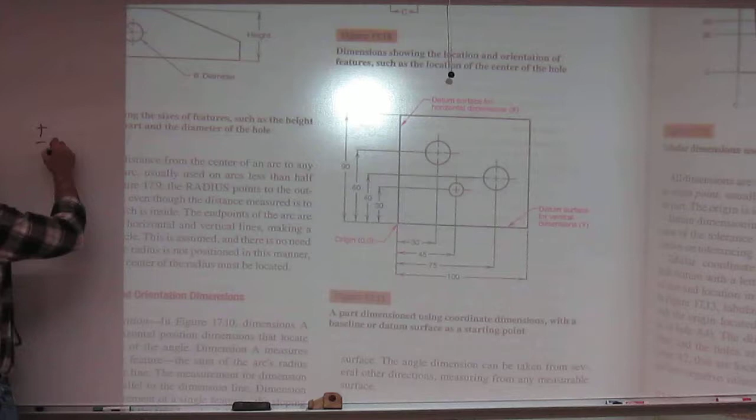0.02 inches. Now, it looks like it's metric. Maybe I'd do 1 millimeter. Anyway, 30. So when I go to locate this hole, I can be assured that that is 29.98 to 30.02, right? Due to that tolerancing.

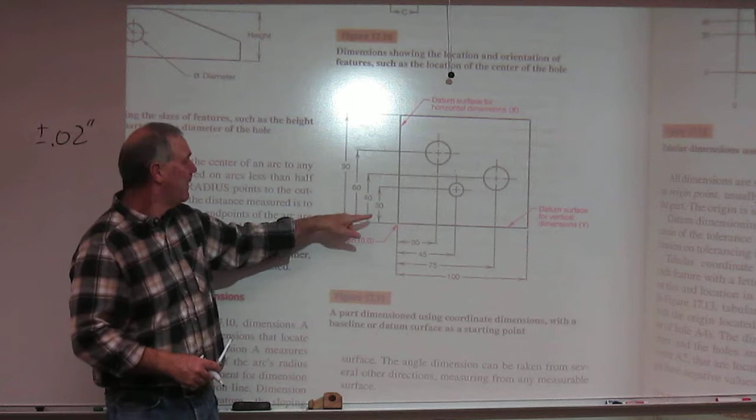Now, when I come to this part, the 40, what's the size of it going to be? It's going to be 39.98 to 40.02, right? It's got the same tolerance. I know it's going to be 40 plus or minus 0.02. What's this guy going to be? 60 plus or minus 0.02. Each dimension has its own tolerance.

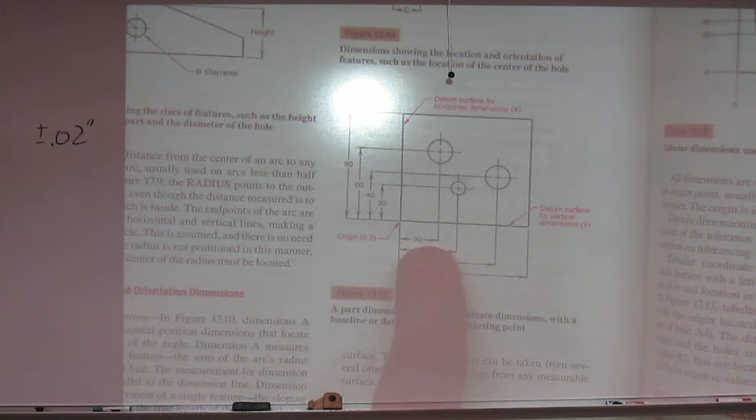If I need a high degree of accuracy, this is the way I'm dimensioning, right here, and it's because of tolerancing. Now, let's compare it with this one. So the first one here is 40. This would be either 39.98 or 40.02. Let's assume right here that it is 40.02. Okay? Now I come to this part, and let's assume it hits its upper limit too. It's going to be 50 plus or minus 0.02.

Let's say it is 50.02. Well, what size is this one right here? It's 130 minus 90. This should be 40, right? Well, can they now do 40, 50, 40, and still stay at 130? Can't do it. They would be over, because this is really tolerancing stack up.

Okay, so on this one, we know we're 40.02 right here. Well, when we get to this side right here, I can be up to 50.04, correct? If I'm measuring from this edge. So this one has that tolerance plus that tolerance. And the next one would have it again and again. And if you put 5 or 6 of these in a row, you can be significantly off if those are important.

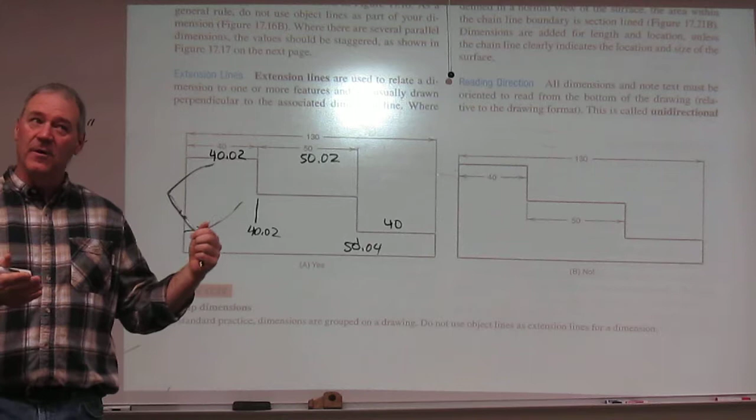Now, when I say this, neither one's good or bad. Maybe what's important is the 50 compared to the 40 compared to the 40. I would use chain. If I need them to be accurate to an edge, I would use coordinate dimension. So keep in mind, those tolerances are what we call tolerancing stack up. It has a significant part to play when we pick a dimension style, because we can see that tolerance transferred from one measurement to the next, and then those two transferred to the next, to the next.

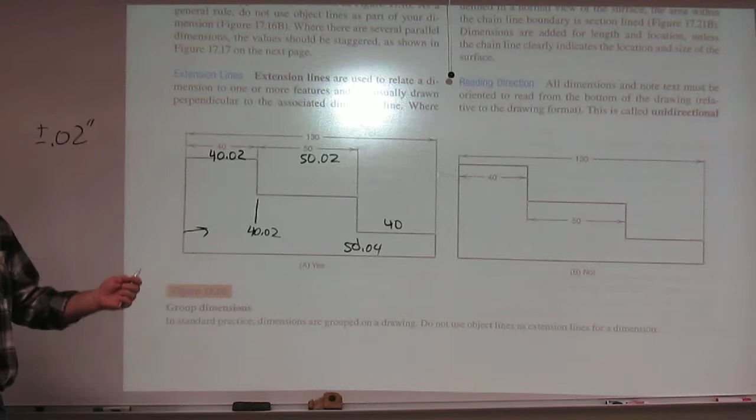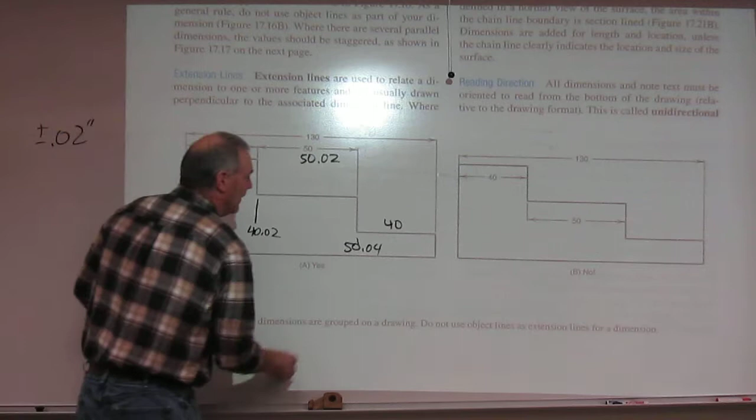You kind of get that? You called it tolerance stack up or stack? Yeah, tolerance stack up is what I usually call it. That just means I've got multiple dimensioning tolerances being applied to the same dimension. So there is a difference on how you do those. Instead of putting the 130, we can continue the dimensioning and put 40 in the area.

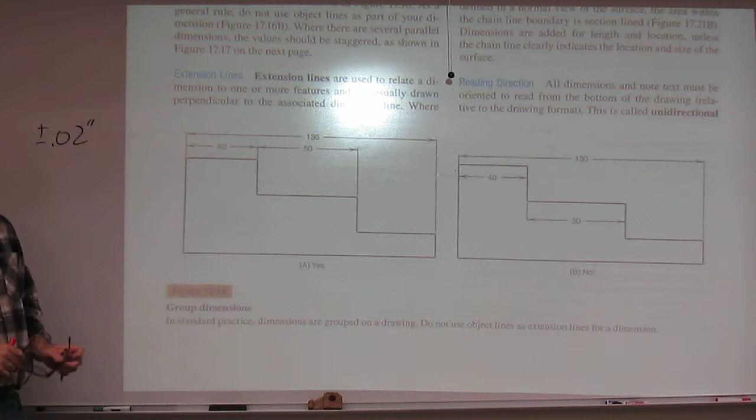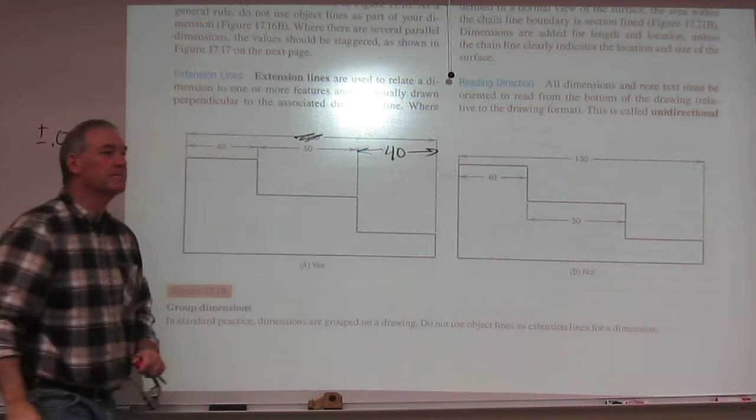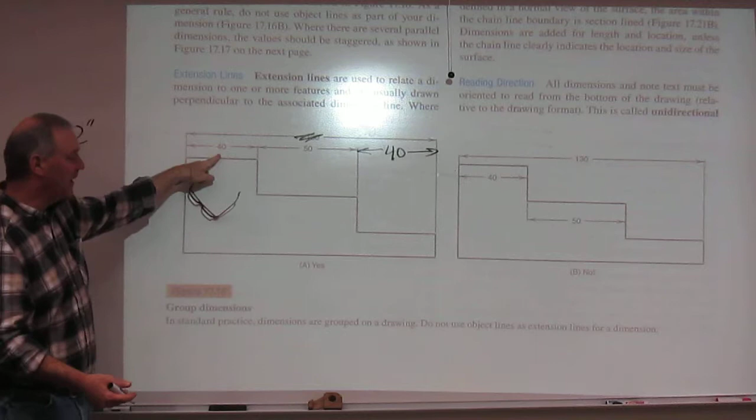Now, that's the other thing I wanted to get to on this figure. So your thing was, why don't I just put a 40 here, tell me if I'm not reading you right, and I don't put that one. Yeah. Okay. This is impossible to build. They will not build this with that tolerance. Statistically, it's impossible. Because keep in mind, this will be 39.98, 39.99, 40, 40.01, 40.02. Well, if I do that and I get over 40.01 and I get over here, I cannot meet this tolerance. I can't meet it.

So what you generally do, and this addresses it, Majed, you're on the right track, but it's dimensioned correctly. What we do is we take the least important part and we don't dimension it in chain dimensioning. So we just leave this area with no dimension, because for some reason we're saying this is the least important part. We know you can't build this due to tolerancing stack up. Bury the error here, because the 130 is more important than the 40. Does that kind of make sense? Because usually the overall is much more important than one of these legs.

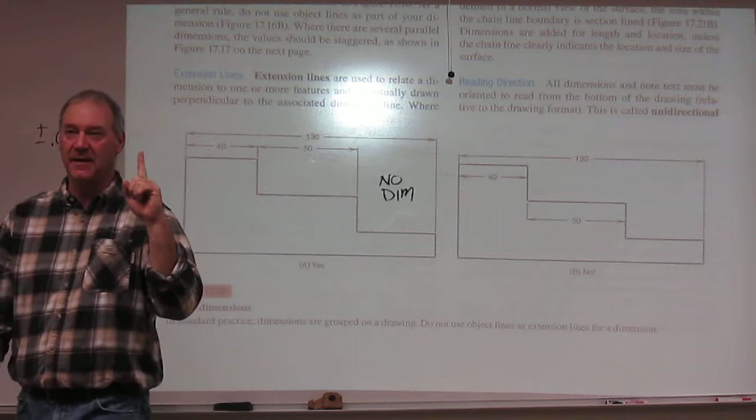Okay, so what we're telling them is we want 40 plus or minus 0.02, 50 plus or minus 0.02, 130 plus or minus 0.02. We don't care what this is. It's going to fall out, right? So leave one leg undimensioned in there. If there's no overall, it will fall out. But if there's no tolerance, you do it? No, that would be double dimensioning.

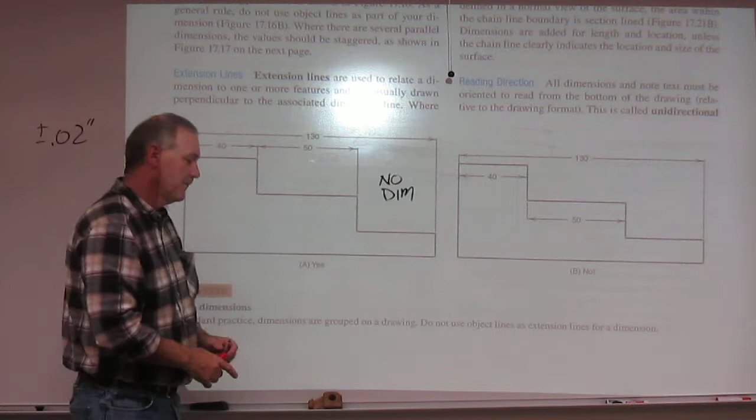I don't put all of them. I certainly don't put 40 and then 130, because that's an unnecessary dimension. That's double dimensioning. So yeah, this thing's dimensioned perfectly the way it is. This will take care of that tolerancing stack up by leaving this leg undone. And that machinist isn't going to come into the room and throw it on your desk and say, you go build that. They see the problems you have. So leave one leg undimensioned.

I think we did that yesterday when we were kind of looking at our figures. We did just one leg and then we did an overall; we didn't do two legs up the side of number 1 and 2.

Do employers have a preference of what you do, or is it just... No, they'll go either way on it. Okay? They'll go either way on it. It depends on how accurate we need to be. So really, it's a function of what the part needs to do, on which method we use. Now, there are some other caveats.

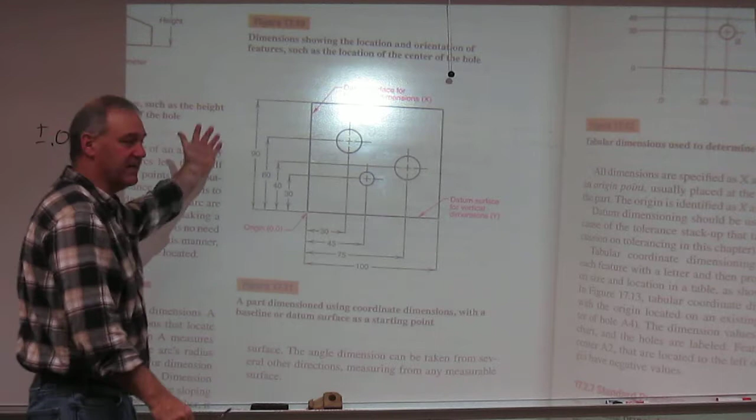We've talked about the tolerancing technique, but let's go back to coordinate dimensioning. Coordinate dimensioning is pulling all dimensions from a fixed edge. It's also called datum dimensioning, same thing. Remember, datum is a theoretical perfect place or plane. This is datum dimensioning, it's also coordinate dimensioning, where they're pulling everything from a fixed edge.

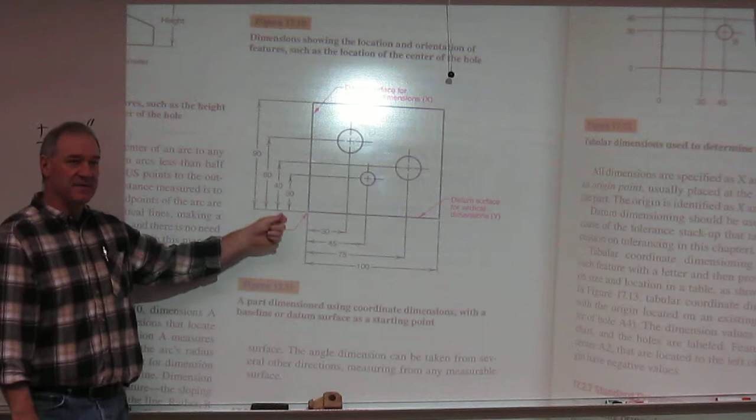Not only is this more accurate than chain in certain instances, this works with cutting equipment. So many times we will use this dimension style if I'm working with some CNC piece of machinery. Do you guys remember when Jim was talking about the 3D printer and said the thing's got a 0 at this point and then it's going to go find the point and start building it? Well, does that work with this?

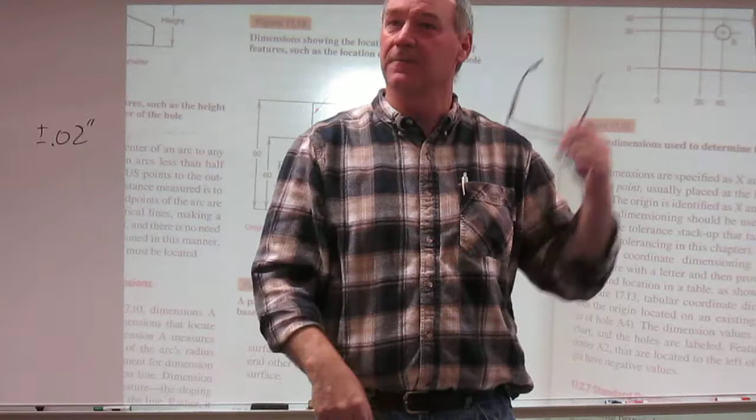Same Cartesian grid. Many times we'll put our parts on 0, 0, and we can ship it right to the computer from ours. Nobody even has to run the machine. We just set it up in the morning and we're cutting all day and never get up and check it, other than to have somebody feed material into it. So a great dimensioning style if you are working with CNC equipment.

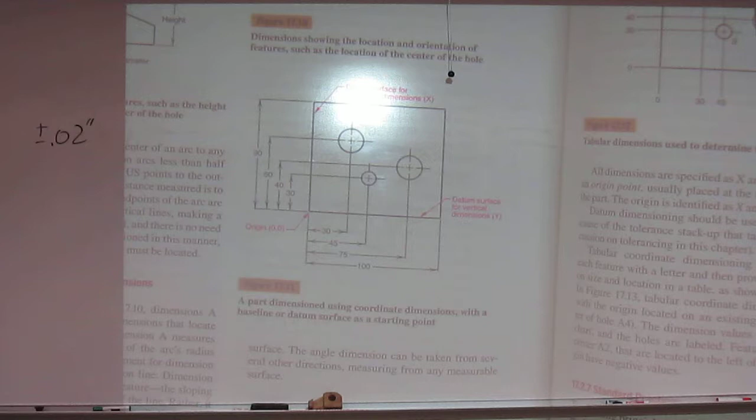We have a few places around here that have those. One of the neatest ones I've seen is Oakley Stone. That's kind of a cool little operation. They have a water cutter for rock. They use this method right here.

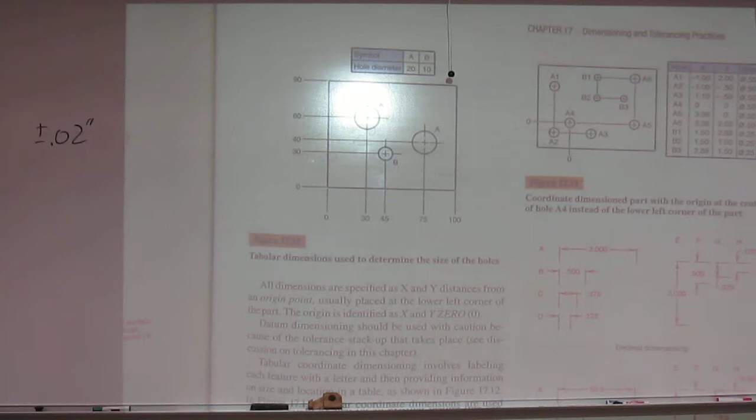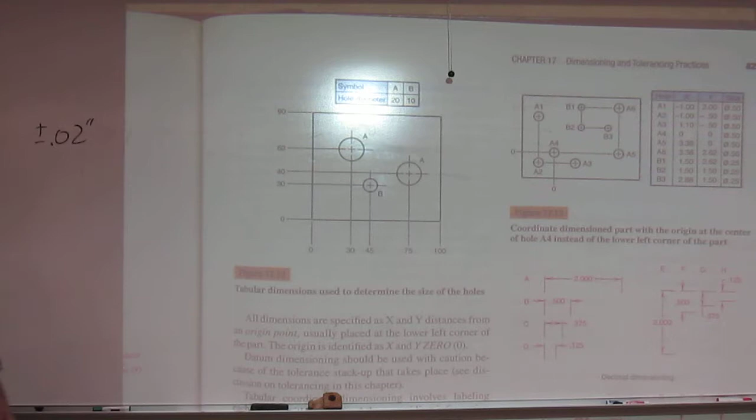Now, besides this one, we also have another technique with coordinate dimensioning that works really well. If you go to figure 17-12, you'll see the start of it. It's called tabular dimensioning. We do this when we have repetitive features. Tabular dimensioning is pulling items off the drawing and putting that dimensional information in a table. It's almost always a coordinate dimension style.

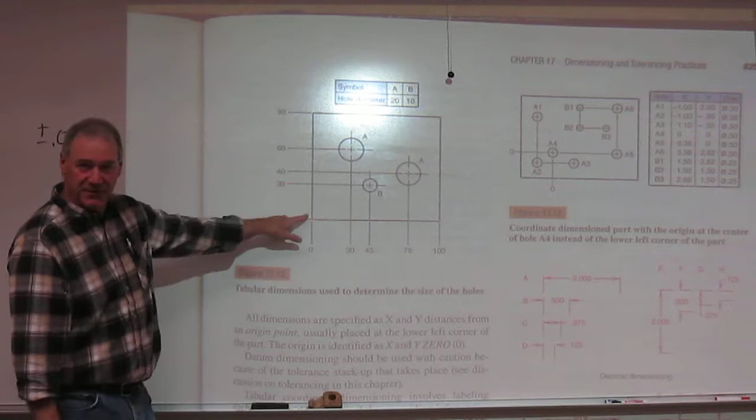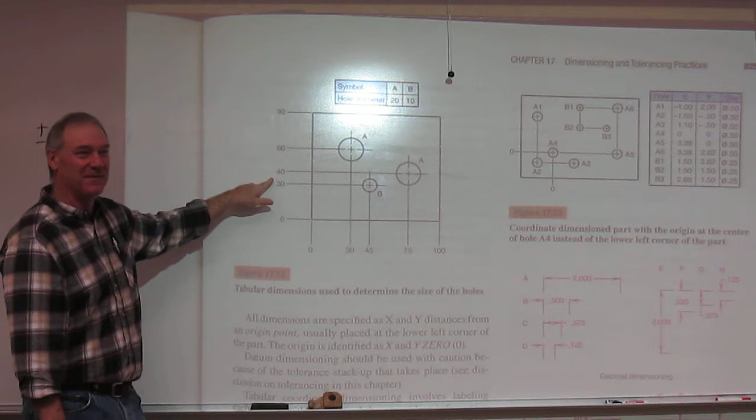So here they've kept the location dimensions of these holes on the drawing. Notice the horizontal, what I said don't use with leaders. We do this with tabular dimensioning or coordinate dimensioning. We pull them straight. Now, this one's all coming from a fixed point or edge, so it's coordinate dimensioning. They've pulled the size out and put it in a table. Why would we do that?

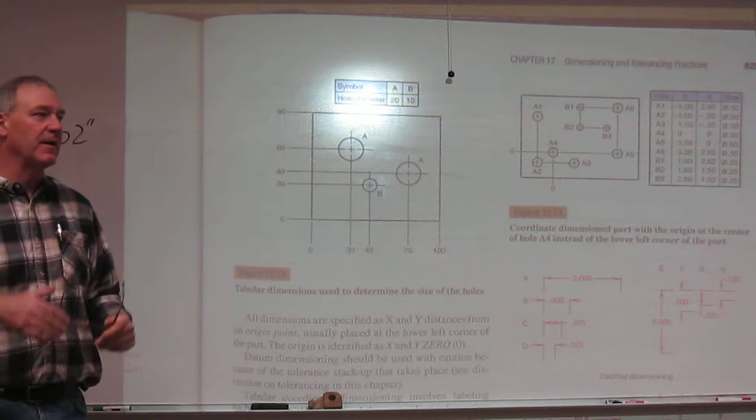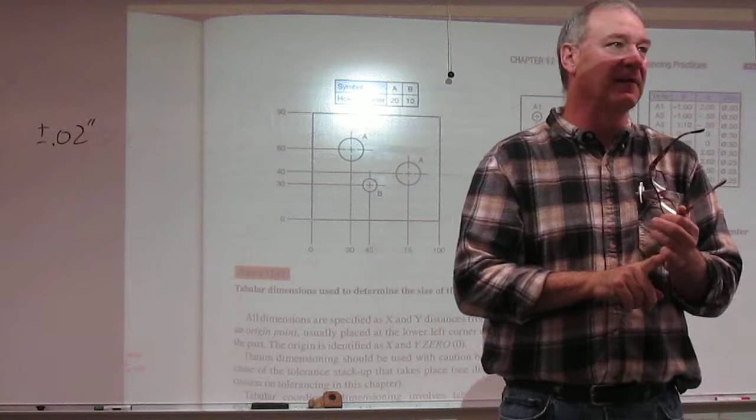Many times we build things that are very similar and we just change the size of holes. Think of PC circuit boards. Think of flanges for pipes. Many of these items are the same. We just change the sizes. Maybe I got a 1/2-inch bolt in one situation, I got a 5/8 in another. So I've got to make the hole bigger. We use the same drawing for both. All we do is edit the table. We leave the drawing the same.

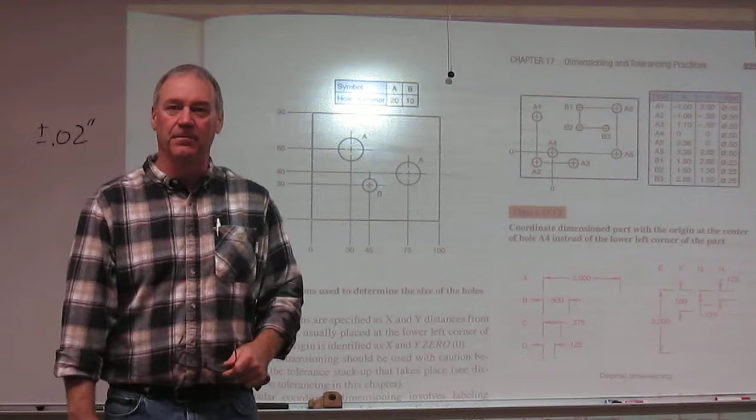Over here, they've gone one step further and pulled location and size out. This is really the process they use for circuit boards, right here. You'll have one circuit board that has a bunch of holes in it, and everything is pulled off and done on the side in a table. With tabular dimensioning, you're putting your dimensions in a table to aid in clearing the drawing up.

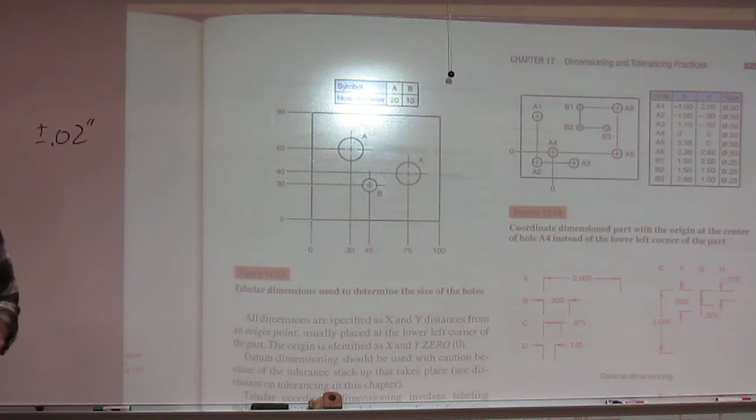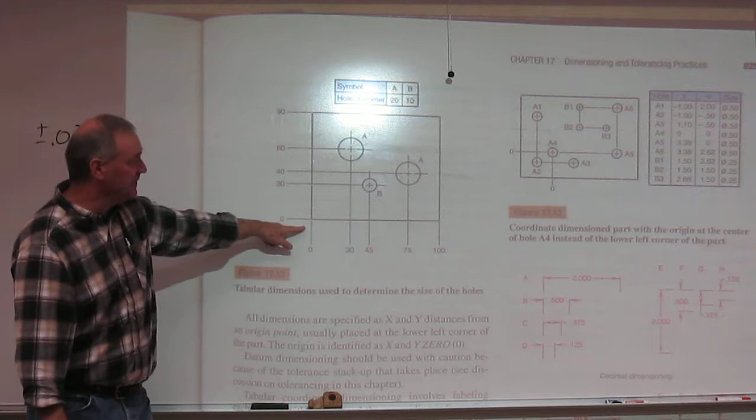Notice you can switch the origin. Like here it's given the origin here. You do need to define the origin if you're using tabular dimensioning. Didn't have to on this one because it's defined on the drawing with coordinates. Yes, Becky? Why would you have the origin at A4?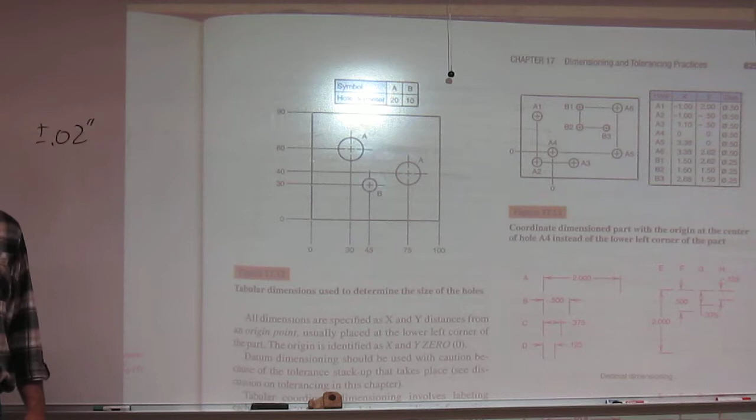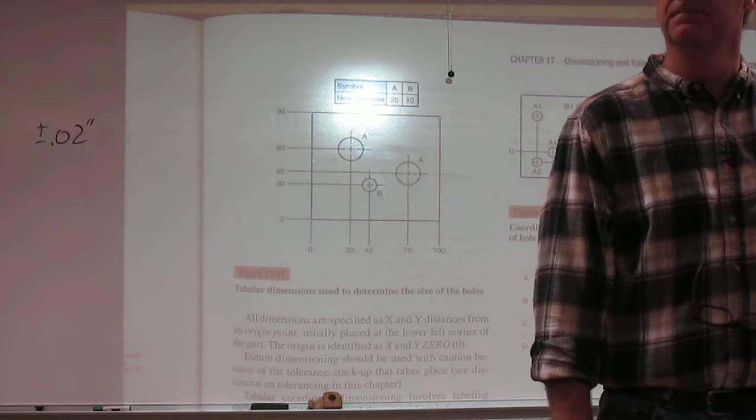Not sure, but you can. I'm not 100% sure. I haven't worked for Micron. I know they use this style, I've seen it. But as far as the purpose behind it, I'm not really positive. Does anybody out there know? Anybody come across something? I'm not sure, just other than the fact that we can move it. Okay.

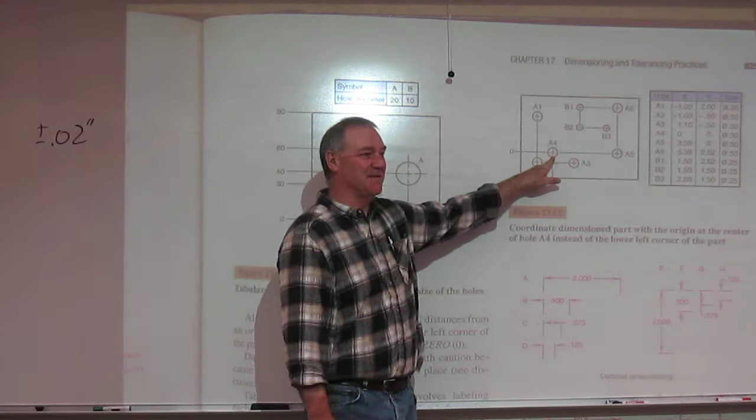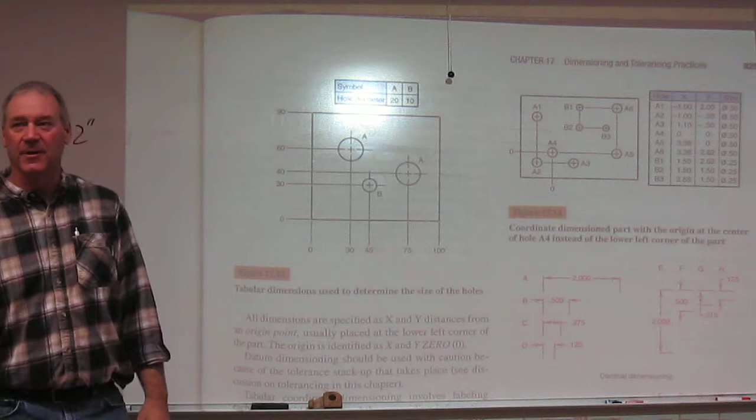I'm guessing, and this is a total guess, this is how I'm mounting the thing somewhere. This is the important hole. Okay, so I would need to make that mount perfectly, because remember, there's slop on everything else. But we're gonna call that one our datum, or our theoretical perfect one.

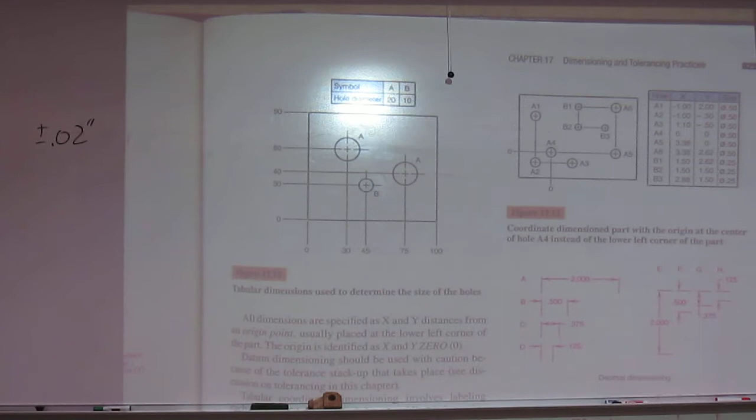All right, boy, we covered a lot there. Let's do some leader stuff here real quick. Just make sure we clear some of this up. When we're doing leaders, let's go to page 828.

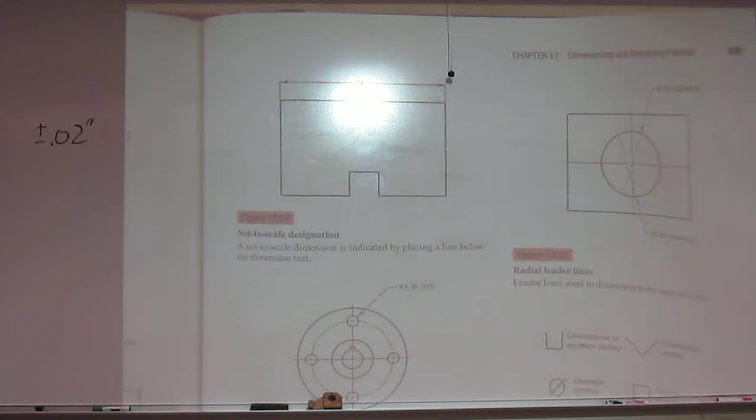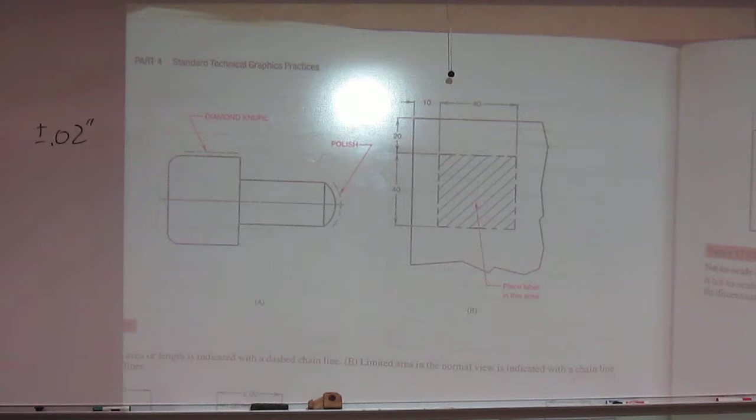So leaders, we already talked about, they point to an object line. You do have some instances that are different. Here they're doing a finished surface. So the leaders are pointing to these chain lines here, and then they're calling out a finished surface.

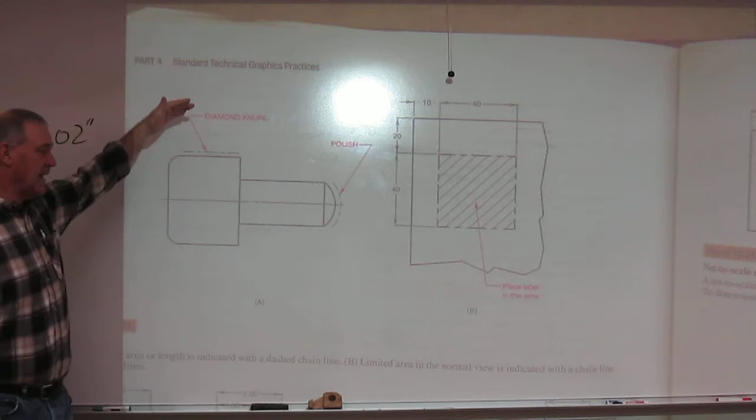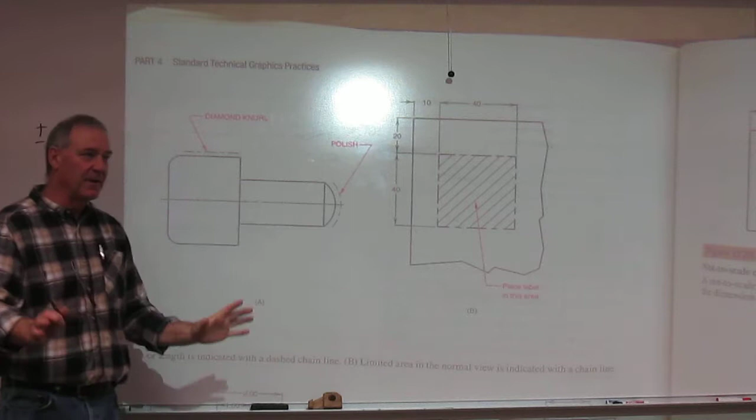So when you're doing surface finishing, like sanding wood or putting a diamond knurl on it, the diamond knurl is that little kind of diamond looking thing that helps you grip stuff. What you do is you put a center line a little bit off of it. They're actually using the chain line from the alphabet of lines here, but for the most part nobody uses that. You'll use a center line and then just point to it.

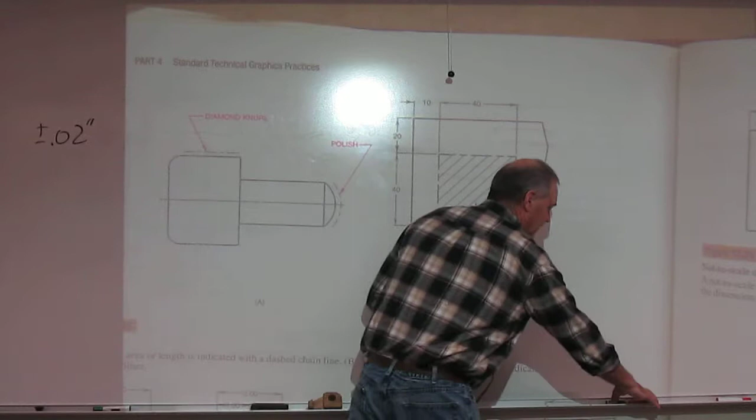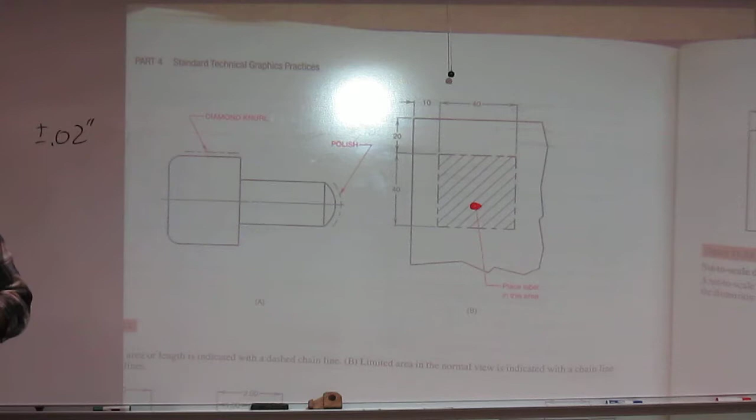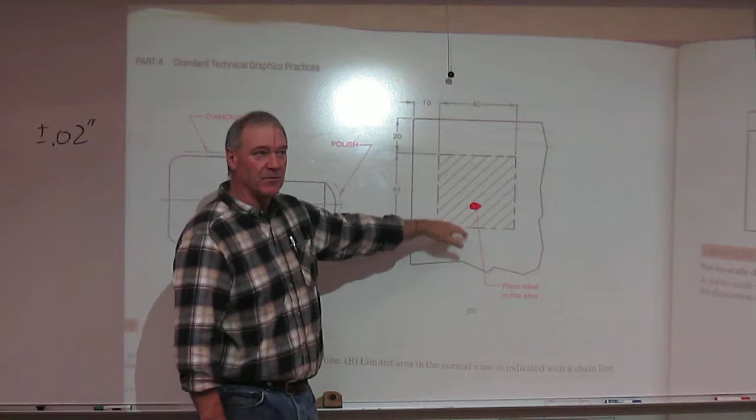Now if you point to the surface, like this one does, the ANSI standard is you should switch that arrow. It should be a solid filled dot. That's the ANSI standard if you're pointing to a surface, not an object line or an edge. Okay? So keep that in mind. If you're coming to a surface, telling them how to treat that surface or whatever the case might be, switch that thing to an 1/8" diameter circle. And it should be closed filled, it should be a solid dot.

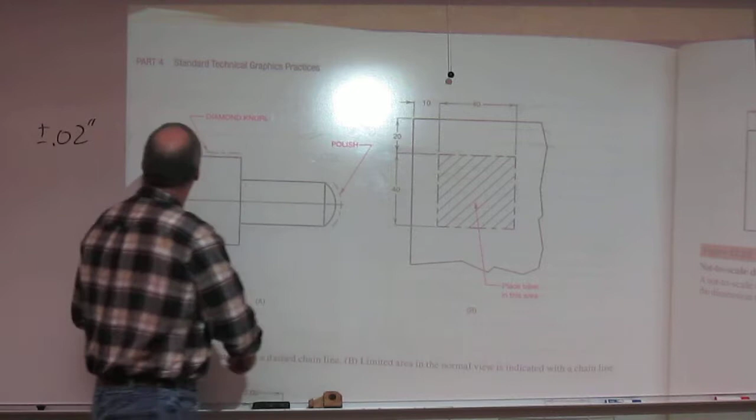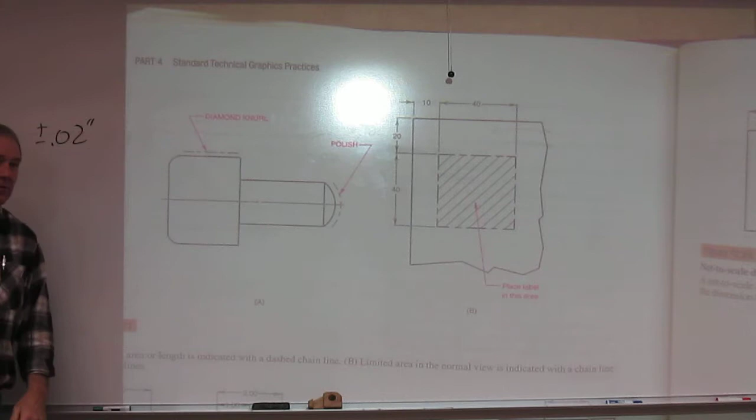And your arrow has to touch a line, it doesn't touch a gap? No, that arrow should always be on a line. Okay. Always. Yeah, never off to the side of it.

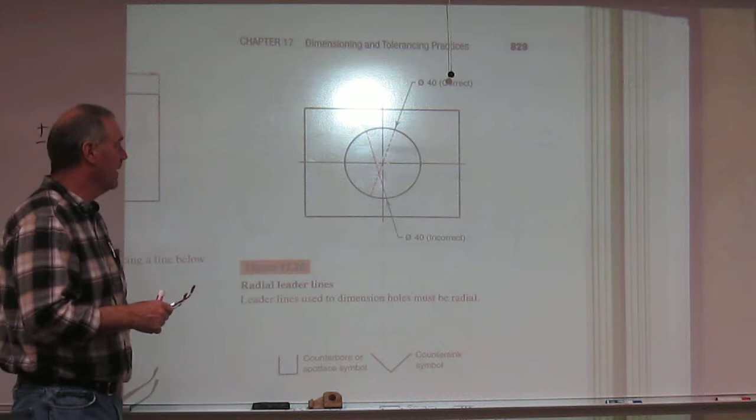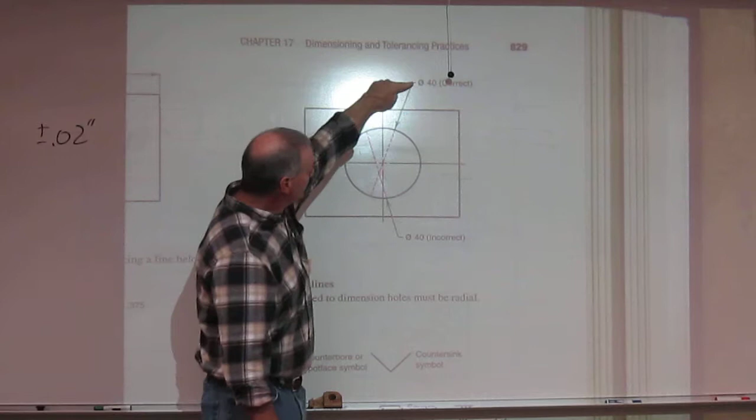When you're doing leaders for cylinders, which, for the mechanical world, is the majority of your leaders, they should be radial. By radial, they should point towards the center. So in essence, that's what they're doing here. They've got the thing coming in, it's pointing to the outside object line, comes up, you got your shoulder, 45 degrees approximately. But this arrow right here, if you were to extend it, it should pass through the center. This thing shouldn't be sitting like that.

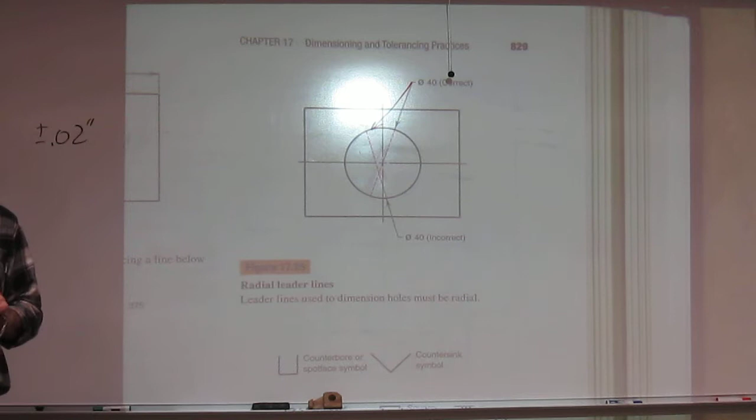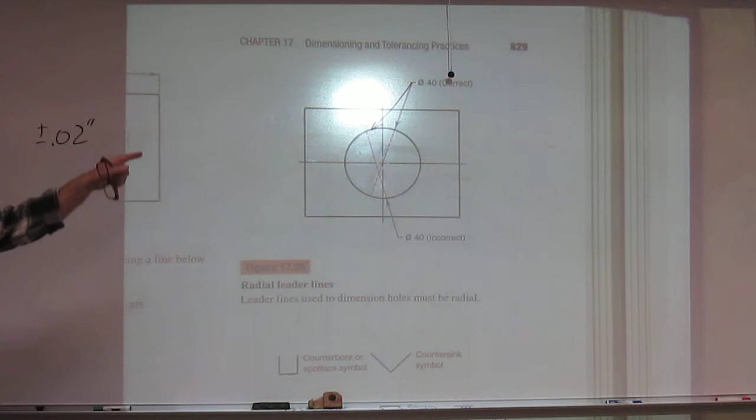Again, we're going to aid them in finding where the center is. As you folks now well know, when you're doing any arc or circle, what's the first thing you have to do? Find the center. When these folks are laying this stuff out to build it, what's the first thing they need to know? Where's the center? So we're going to do everything we can to help that out. So all your leader lines will be radial when dealing with circles or arcs.

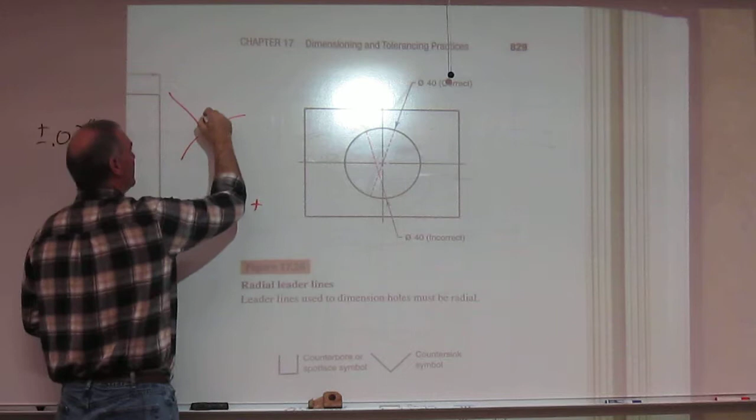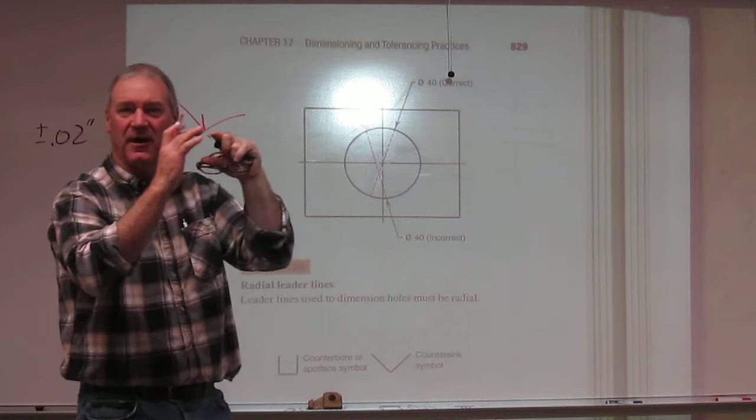If I have an arc, and maybe it's so small I don't even have this cross, doesn't matter, folks. At that point, I am still radial, where if I was to extend that, it would pass through the center, even if I don't show it. This isn't even on here. It's a real small one. I can't put it on there. I leave it off. Remember, I've told you that many times. Get so small you can't do the cross, leave it off. My leader line should still be radial, or point towards the center.

How long have I been going? I've been going 45 minutes. I got a question for you.

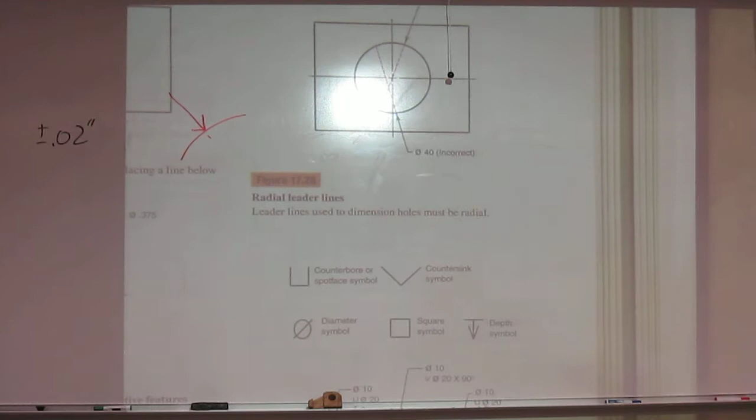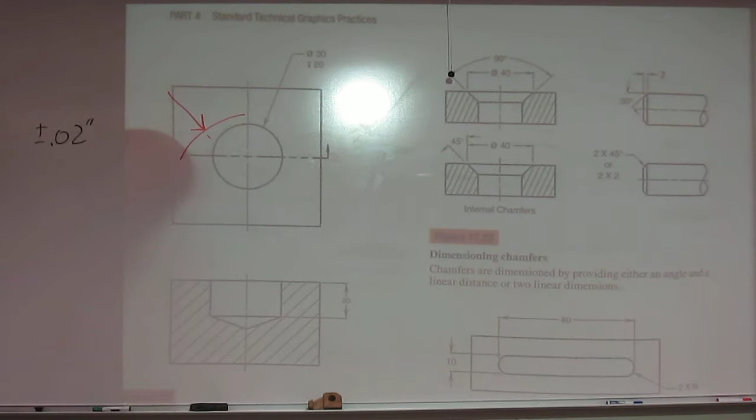Sure, shoot. When you're dimensioning a diameter, you always point to the outside, and the radius, you come from the inside, or you can go the outside or inside for the radius. Is there a preference for when you do that? Yeah, we do have a preference. That's actually tomorrow's lecture, but let me just kind of point it out, since you're already there. On a full circle diameter, it should be outside like this one. Full circle should be outside. Whenever you use a diameter, your arrow should be the outside.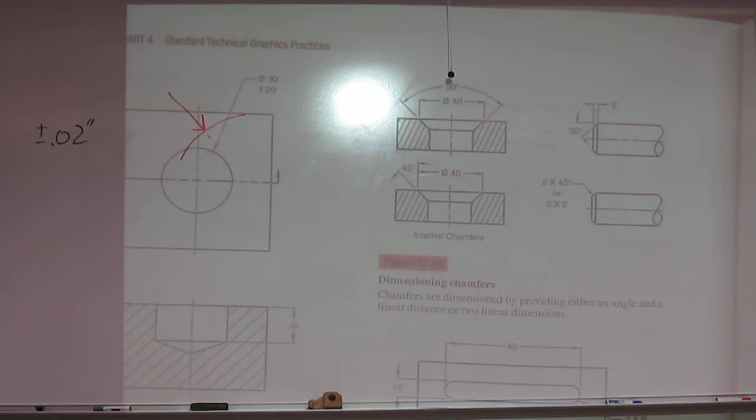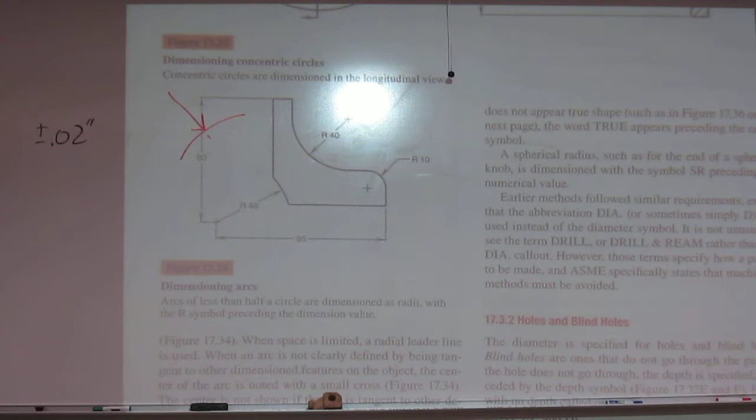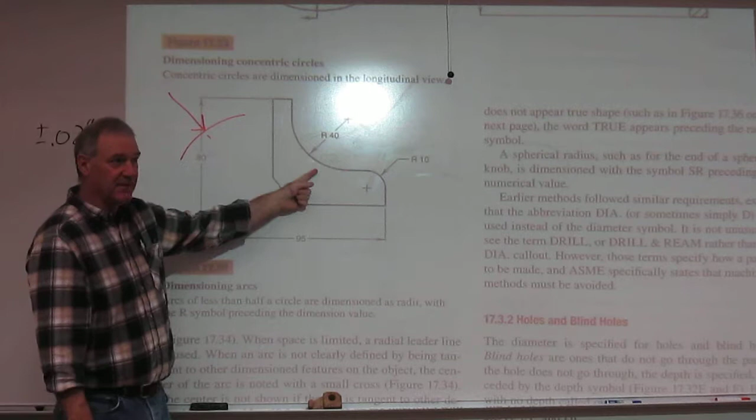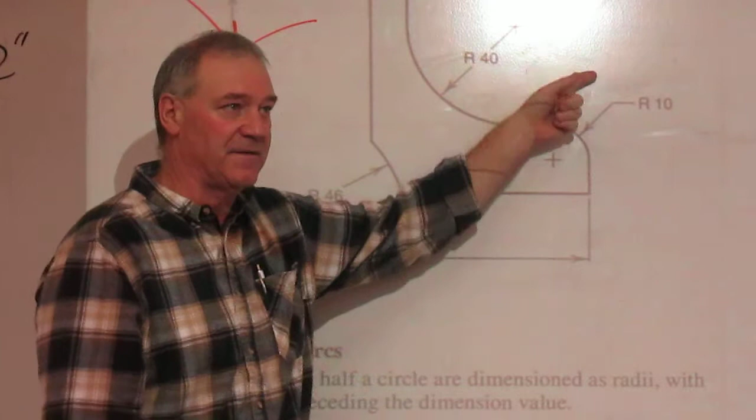And then let me just point out this figure. We're gonna come back and look at it later, but go to figure 17.34. We'll look at this again tomorrow when we do a detailed study. This is the way your radius should look. So on a radius, your arrow should always be on the inside of the curve. Hopefully the text is also on the inside. Sometimes these will get so small that I can't, like this one, and then I revert back to a full circle and I pull it to the outside. But this is the preferred. It's inside the curve.

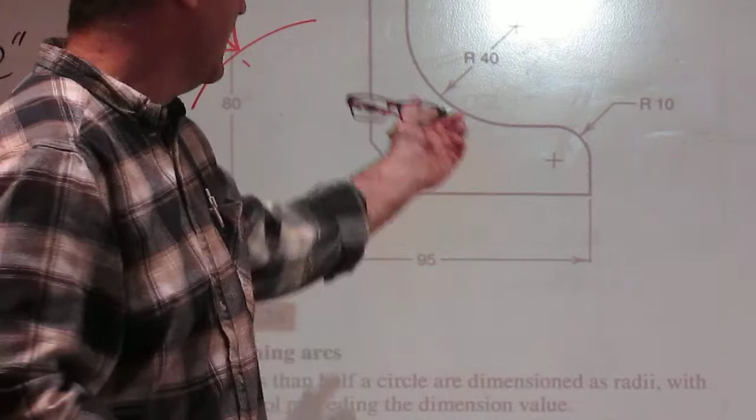But it can be outside if it gets really small. Yeah, because you've seen, we do all those fillets and stuff, many of them are 16th and 8th. You aren't getting an arrowhead in that space. Then you would pull it to the outside. We'll talk more about that later, so a worthwhile rabbit trail to get on. Okay.